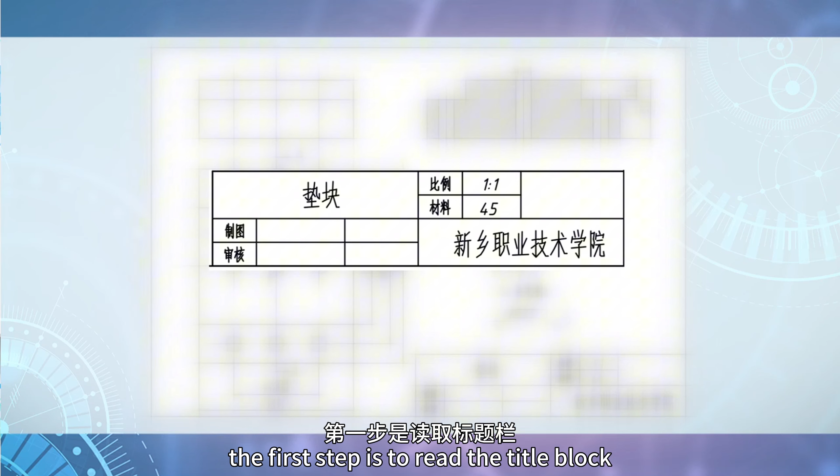First of all, let's analyze today's drawing. According to our drawing reading steps, the first step is to read the title block. The name of this part is a spacer block. The drawing scale is 1:1. The material is number 45 steel.

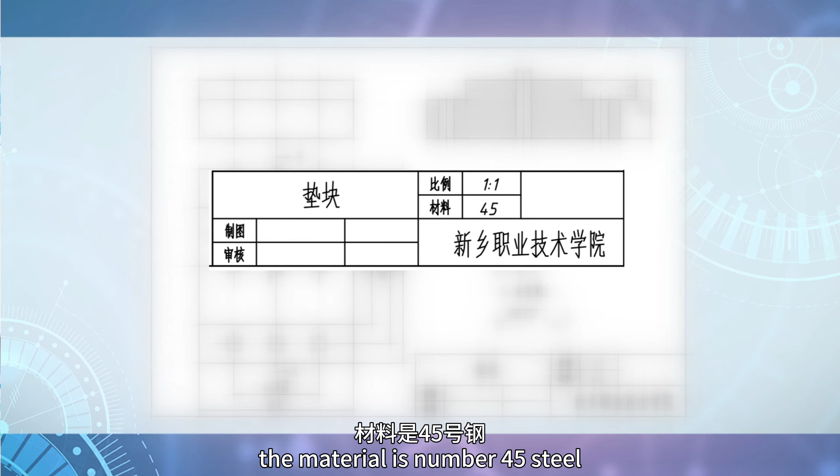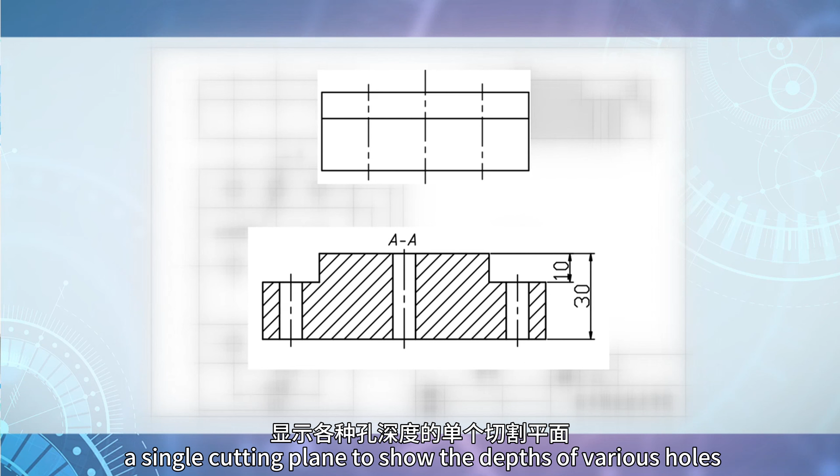The second step is to read the views. This part uses 3 basic views. Among them, the front view and the left view can reflect the step structure and the overall height. The left view uses a full section view with a single cutting plane to show the depths of various holes. The top view shows the distribution of holes on the workpiece surface.

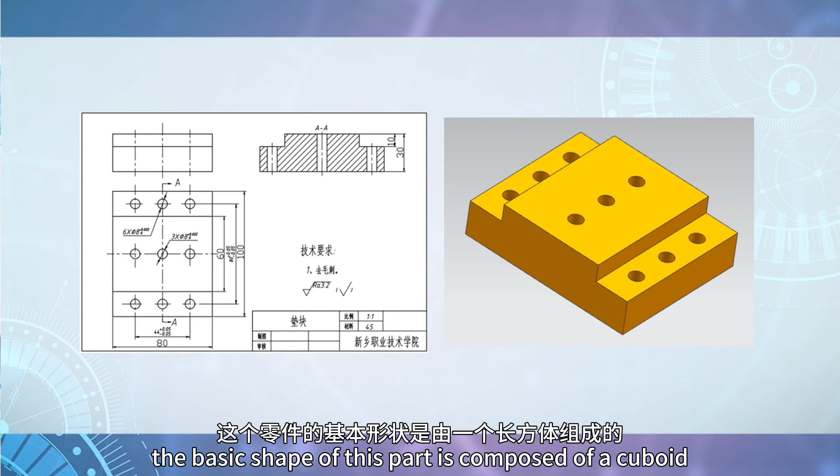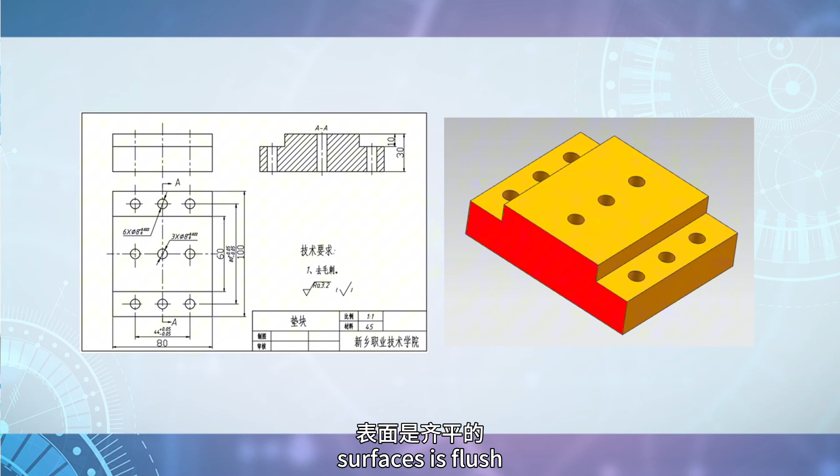Next, we'll conduct a shape analysis. The basic shape of this part is composed of a cuboid. On this basis, after milling, we obtain the top surface, bottom surface, stepped surfaces, and multiple holes. The connection relationship between the left and right surfaces is flush. The side surfaces of the front and rear bosses and the side surface of the base plate are not flush with each other.

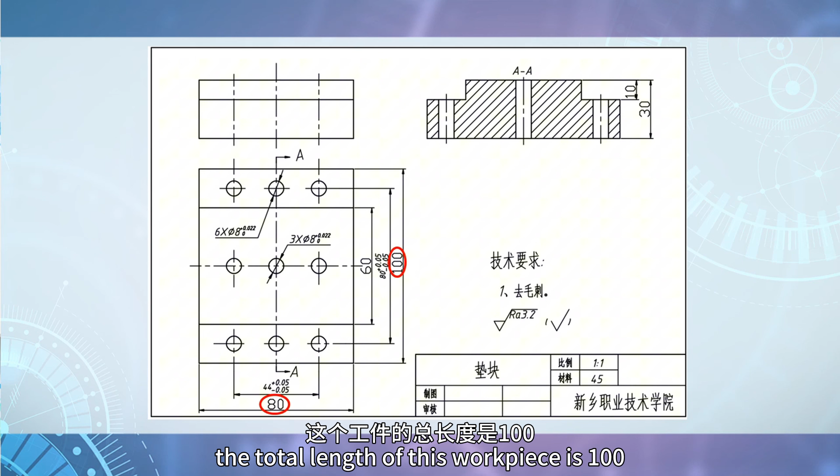Third, let's read the dimensional annotations. First, look at the overall dimensions. The total length of this workpiece is 100. The width is 80 and the height is 30. Next, look at the datums in each direction. The length and width directions are based on the center of the workpiece. The height direction is based on the bottom surface.

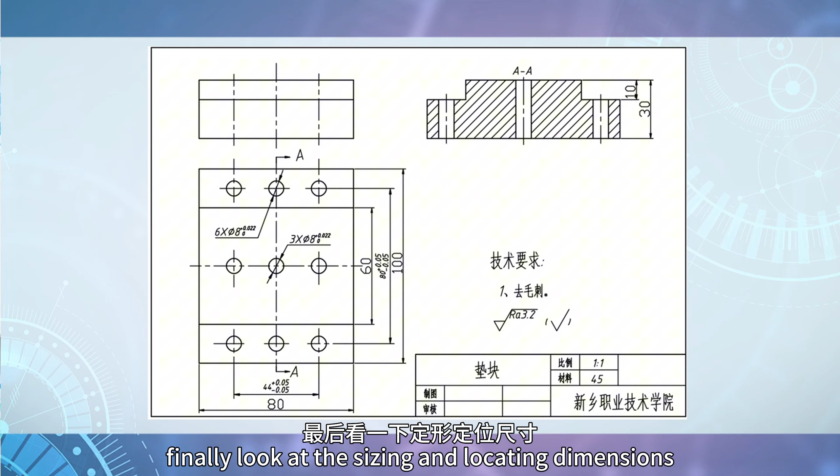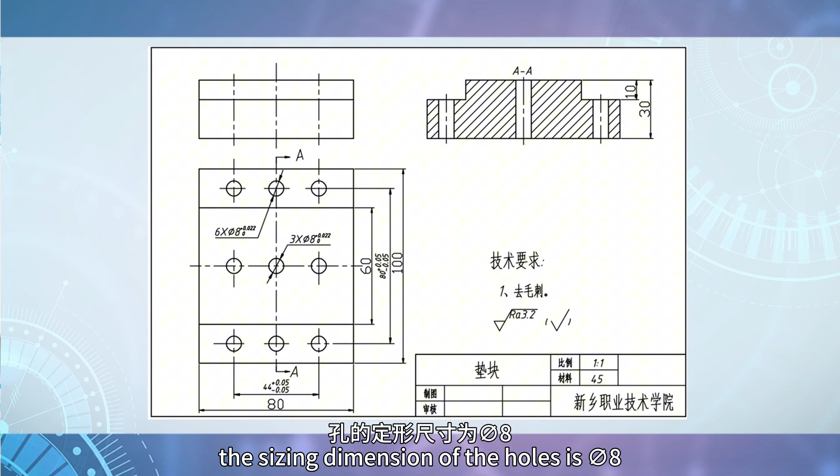Finally, look at the sizing and locating dimensions. The main machined elements of this part are the stepped surfaces and holes. The main sizing dimension of the stepped surfaces is the height dimension of 10. The locating dimension is 60. The sizing dimension of the holes is phi 8. The locating dimensions are 44 plus or minus 0.05 and 80 plus or minus 0.05.

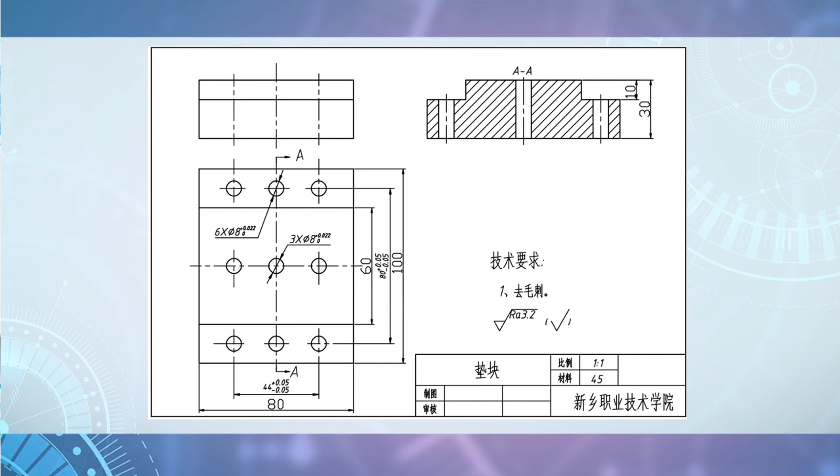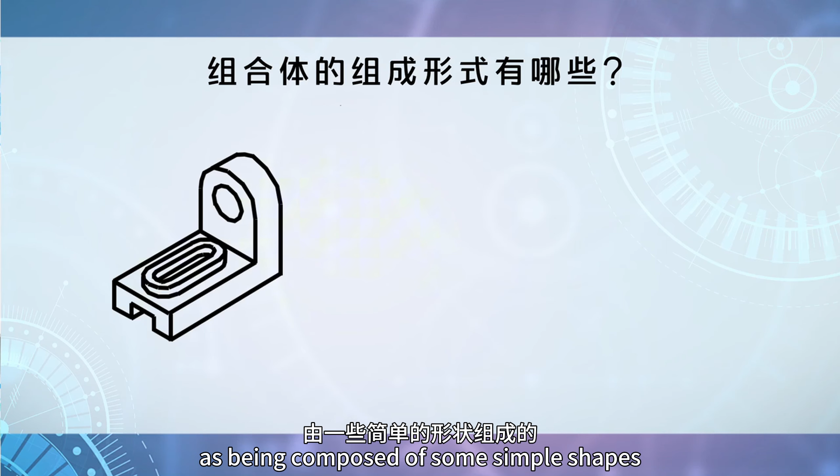After analyzing the above drawing, today we will focus on guiding you to understand the composition forms and surface connection relationships of the composite bodies in the drawing. First, let's understand what the composition forms of composite bodies are. Any complex shape can be regarded as being composed of some simple shapes through certain combination methods.

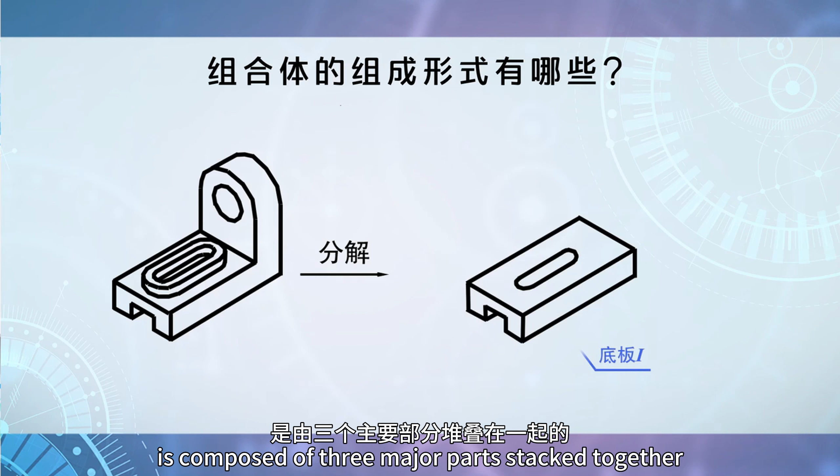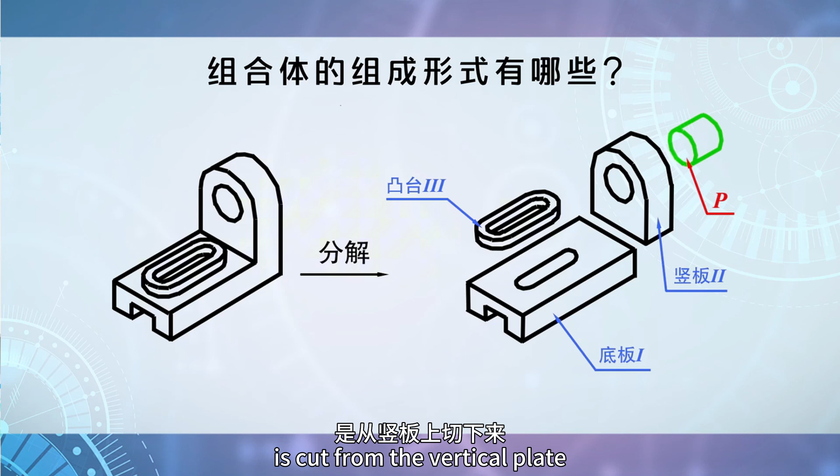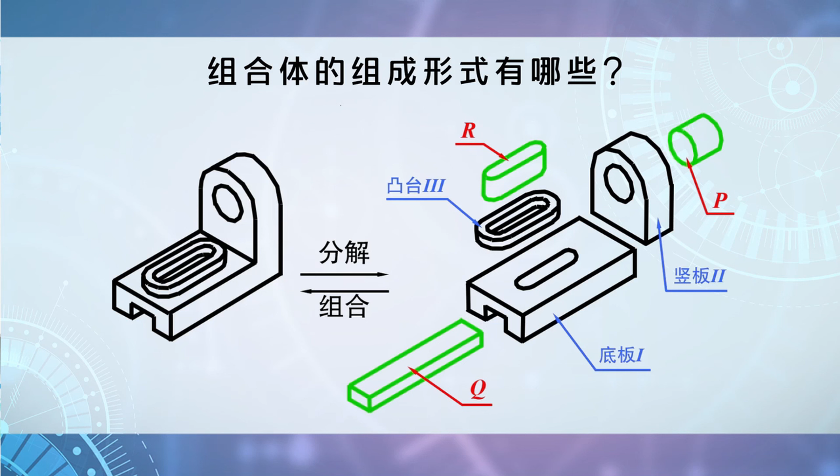For example, such a part is composed of 3 major parts stacked together: the base plate 1, the vertical plate 2, and the boss 3. Then, based on this, a small cylinder P is cut from the vertical plate, a rectangular prism Q is cut from the base plate, and an ordinary key R is cut from the boss, ultimately forming such a part. From this, we can see that no matter how complex a part is, it is composed of several basic bodies through 2 basic forms, cutting and superposition.

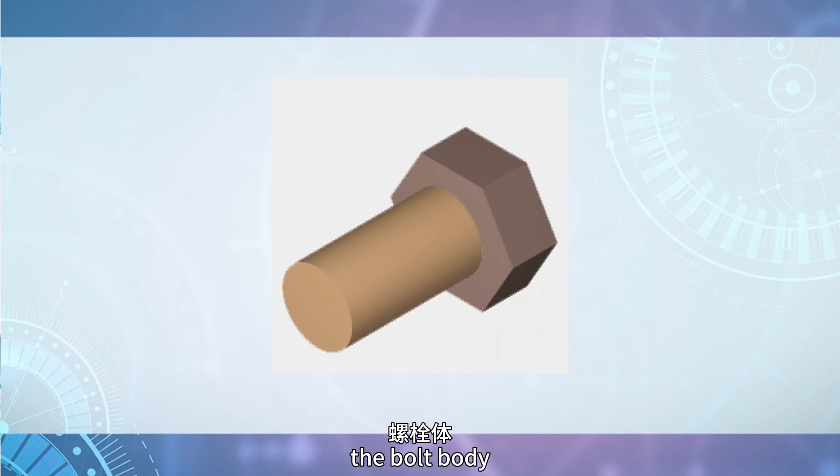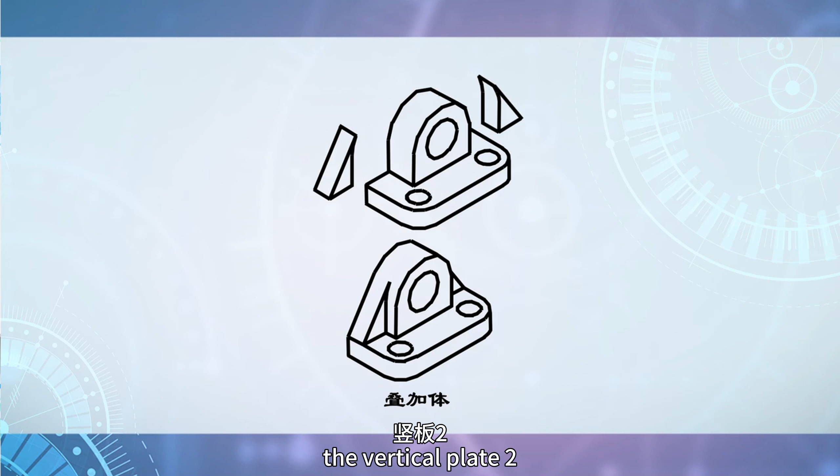Among them, the superposition type is a combination method where the surfaces of several basic bodies overlap, are tangent, or intersect to form a whole. As shown in the figure, the bolt body is formed by superposing a cylindrical basic body and a hexagonal prism basic body. As shown in another figure, the part is also a typical superposition type composite body. It is stacked together by the base plate 1, the vertical plate 2, and the left and right ribs 3 and 4. Then, simple cutting operations are performed separately. Finally, such a part is formed.

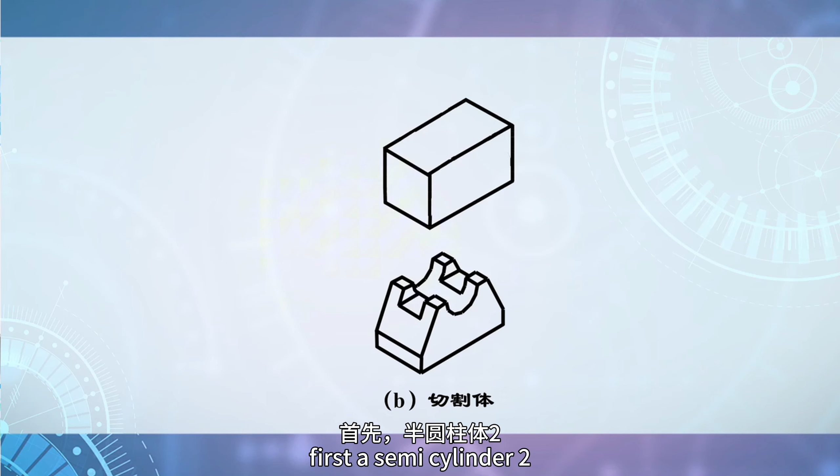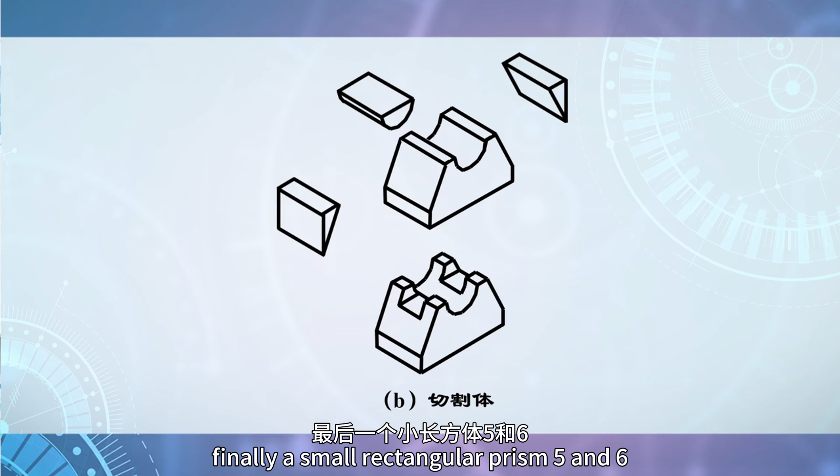The cutting type is a solid formed by cutting off several small pieces from a basic body. As shown in the figure, the part is first formed by a rectangular prism 1. First, a semi-cylinder 2 is cut out from the middle of the upper surface. Then, triangular prisms 3 and 4 are cut out from the left and right sides, respectively. Finally, small rectangular prisms 5 and 6 are cut out from the middle. And ultimately, the most common composite body is obtained through a combination of superposition and cutting. For example, the part shown in the diagram.

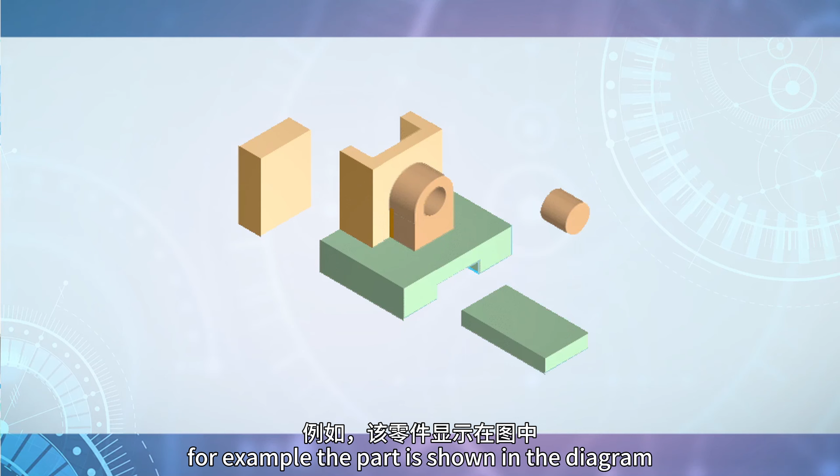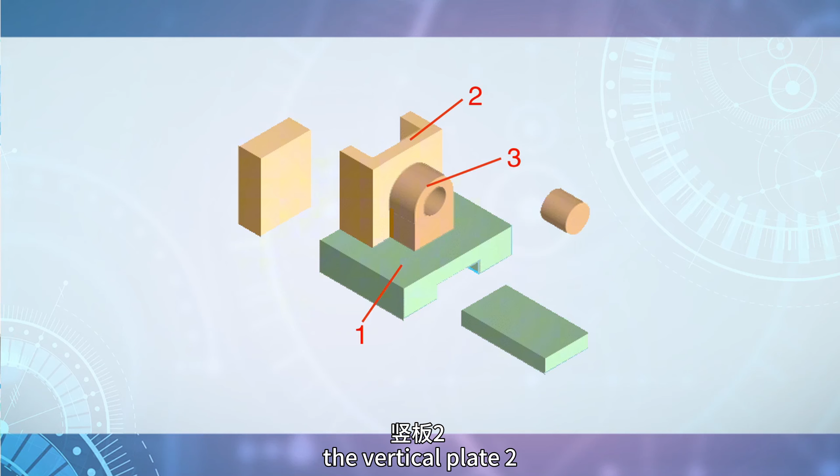First, it is composed of 3 superimposed parts: the base plate 1, a rectangular prism, the vertical plate 2, an upright rectangular prism, and the boss 3, a combination of a rectangular prism and a half cylinder. Then, a small rectangular prism 4 is cut out from the center of the bottom surface of the base plate.

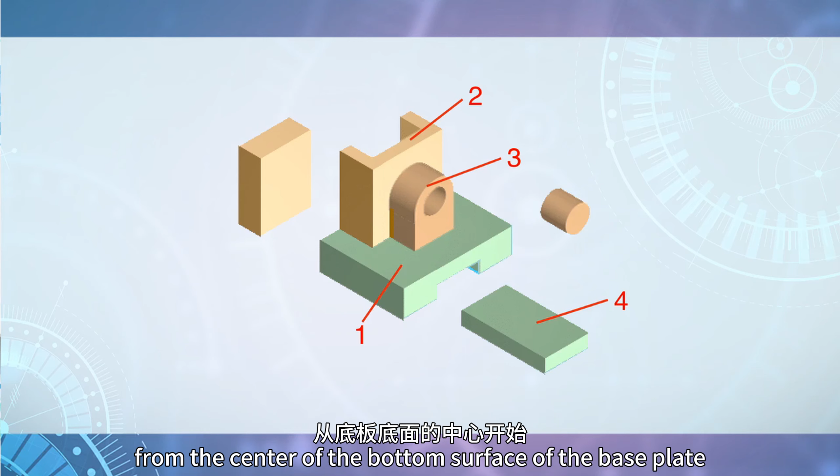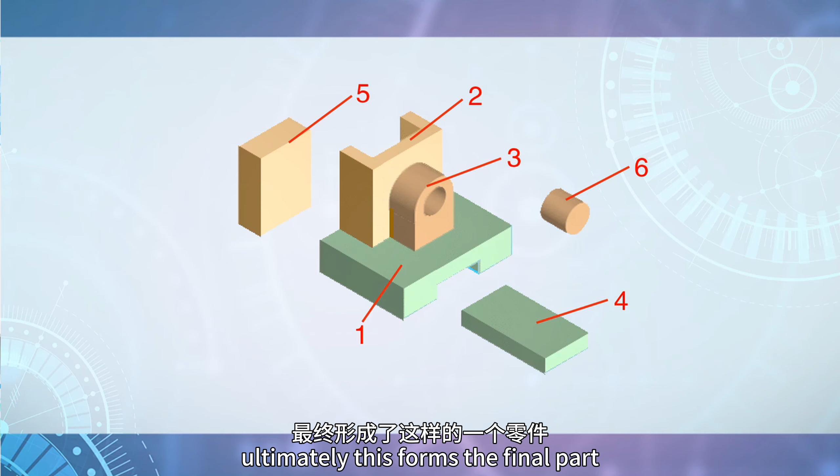Next, a rectangular prism 5 is cut out from the back of the vertical plate. Then, a small cylinder 6 is hollowed out from the front boss. Ultimately, this forms the final part. This is a typical example of a combined superposition and cutting process. This form is also the most common combination type in mechanical parts.

Through the above analysis, we find that the drawing of this task can be understood as a typical combined cutting assembly. First, based on rectangular prism 1, rectangular prism 2 is cut out from both the front and back surfaces. Then, 9 cylinders are cut out from the top surface and stepped surface to form holes.

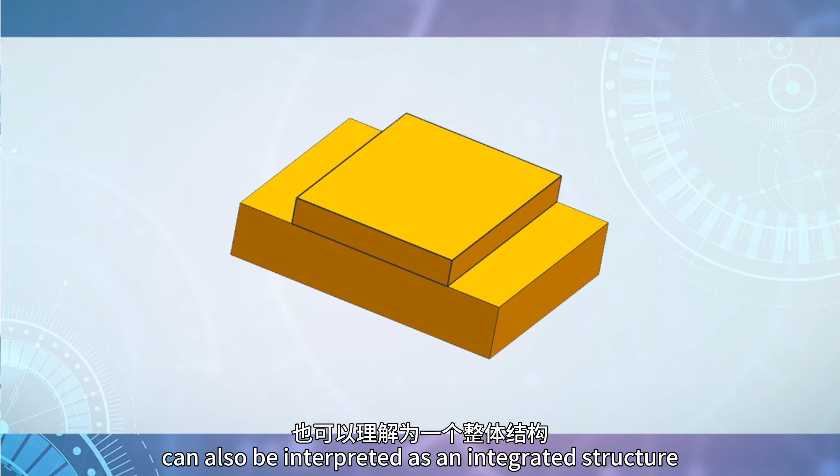Meanwhile, this combined form can also be interpreted as an integrated structure. First, a small rectangular prism 2 is superimposed onto the middle of the bottom rectangular prism 1. Finally, 9 cylinders are cut out to form holes, resulting in the final workpiece.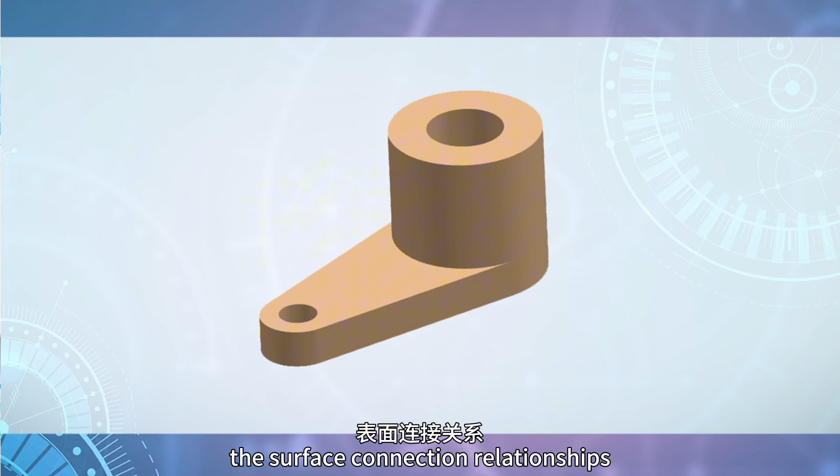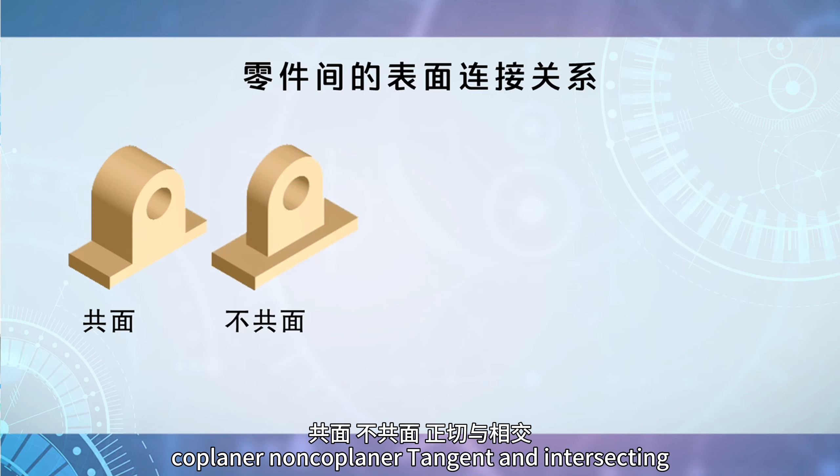Now that we understand the combined form of the assembly, let's analyze in detail the surface connection relationships between the combined parts. The surface connection relationships between parts mainly include 4 types: coplanar, non-coplanar, tangent, and intersecting. How are these 4 connection types distinguished and represented in technical drawings? Next, we will introduce the drawing conventions for different connection forms in detail.

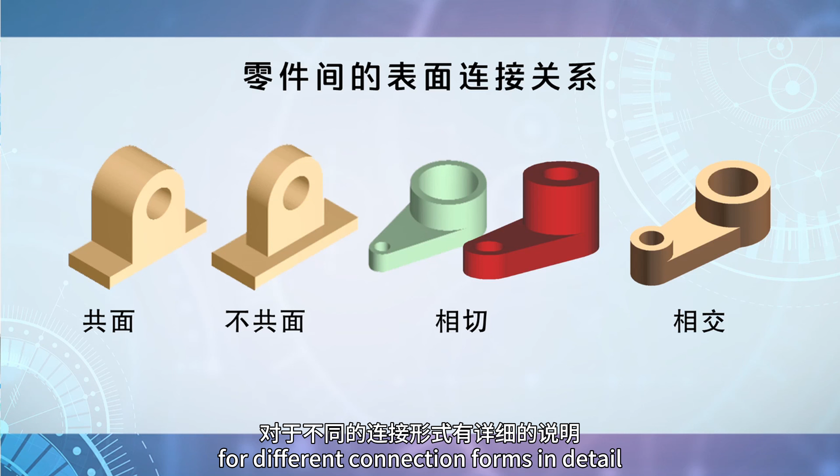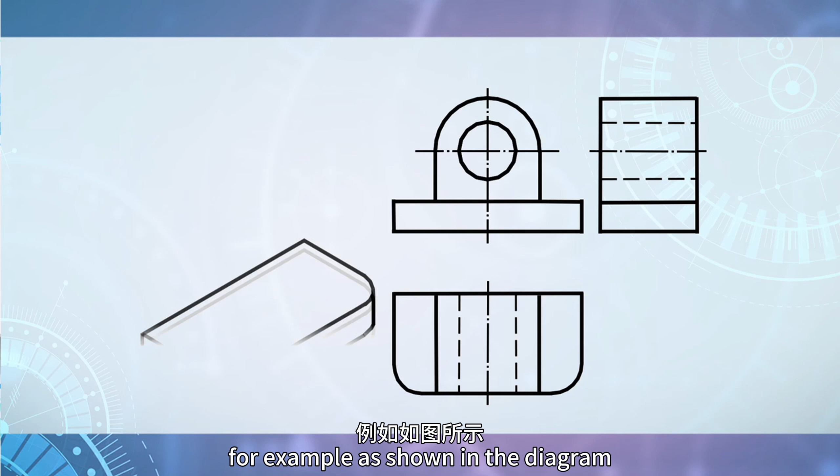First, let's examine the coplanar and tangent connection types. A coplanar connection means the surfaces of 2 objects are flush. At the flush location, no dividing line should be drawn in the projection drawing. For tangent connections, since the tangent line is not a contour line of the shape, it should not be drawn in the projection drawing. For example, as shown in the diagram, surfaces 1 and 2 are coplanar.

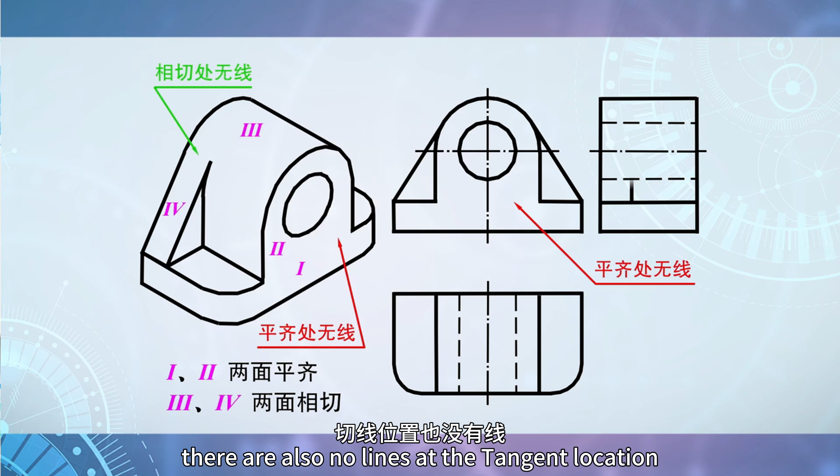Therefore, there are no lines at the flush junction in the physical object or the 3 orthographic views. The left and right ribs 4 are tangent to the cylinder 3. Therefore, there are also no lines at the tangent location in the physical object or the 3 views, as shown in the left side view and top view.

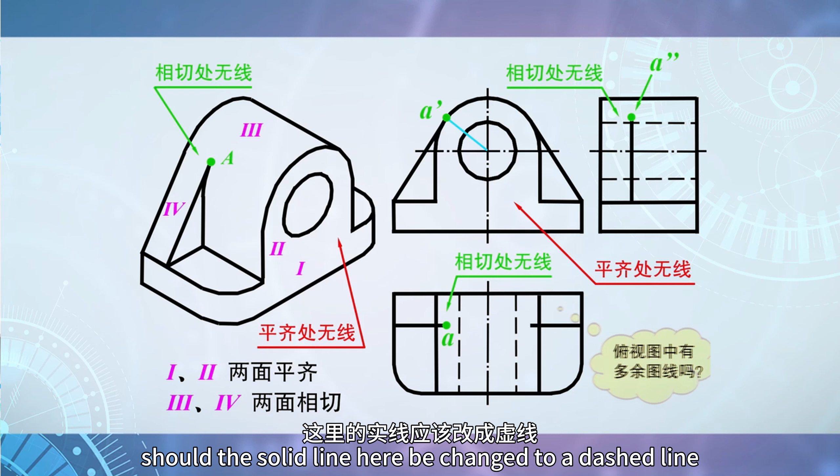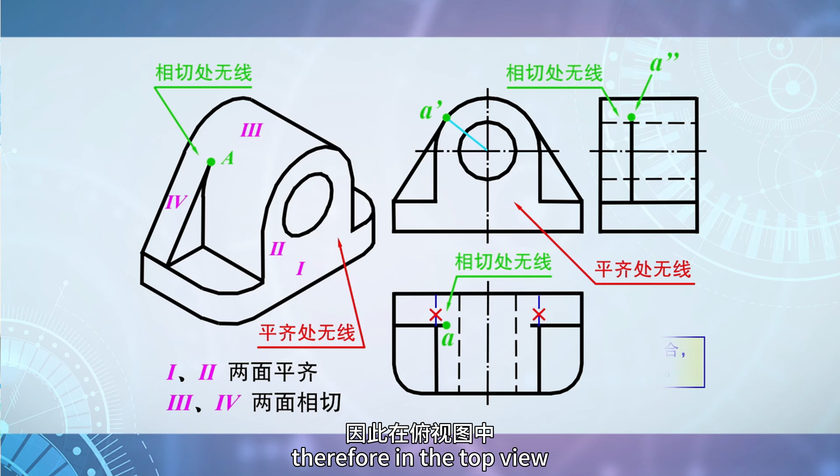After the sides of the original shapes 1 and 2 intersect, they are obscured by the ribbed plate. Then, in the top view, should the solid line here be changed to a dashed line? Now, please pay attention. This is the area where mistakes are most likely to occur. When shape 3 and rib 4 are superimposed, the 2 shapes merge. There are no lines inside anymore. Therefore, in the top view, there are also no dashed lines here.

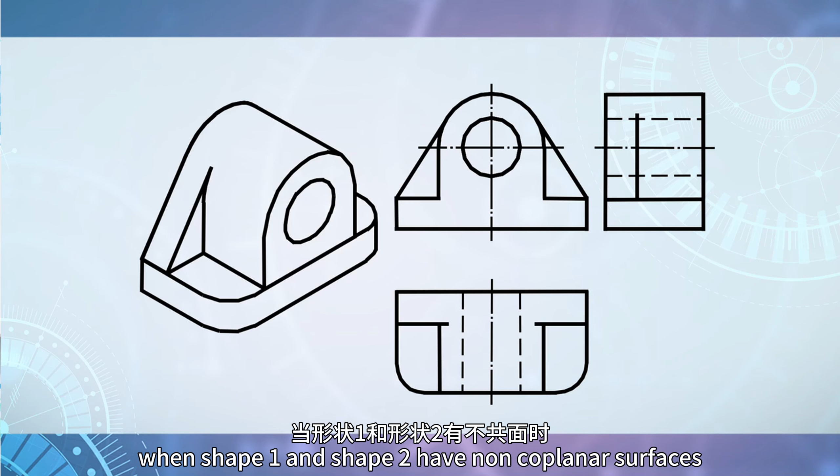Next, let's look at the non-coplanar connection type. Non-coplanar means not flush. If adjacent surfaces are not flush, a dividing line should be drawn at the junction. When shape 1 and shape 2 have non-coplanar surfaces, that means not flush, then there should be a line here. Similarly, rib 4 is tangent to cylinder 3. Therefore, there are no lines at the tangent location.

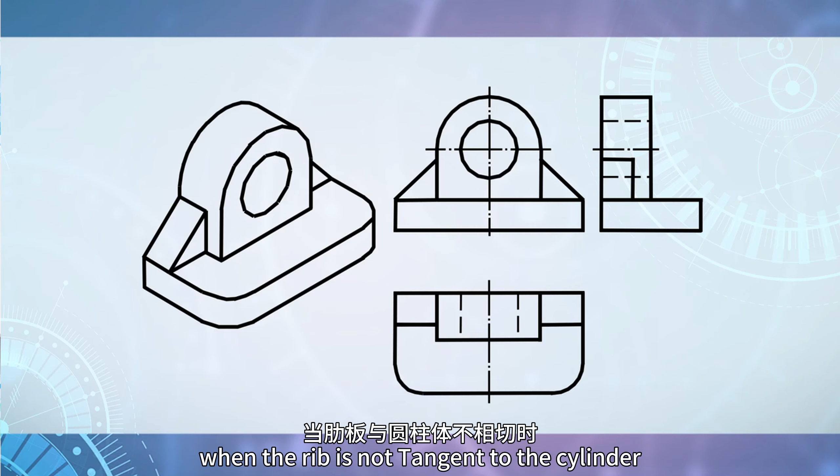Furthermore, let's examine the intersecting connection type. When the surfaces of 2 basic shapes on an assembly intersect, an intersection line should be drawn at the intersection. When the rib is not tangent to the cylinder but intersects it, it means not only are surfaces 1 and 2 not flush and require an intersection line, but since surfaces 3 and 4 also intersect, an intersection line should also be drawn at their intersection.

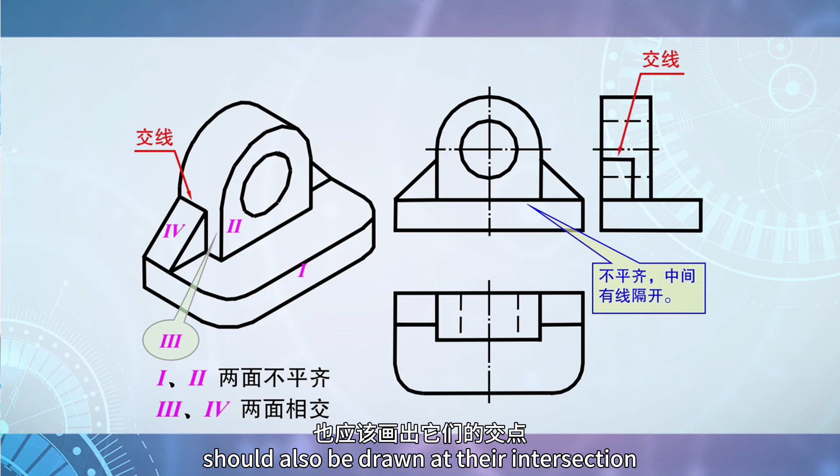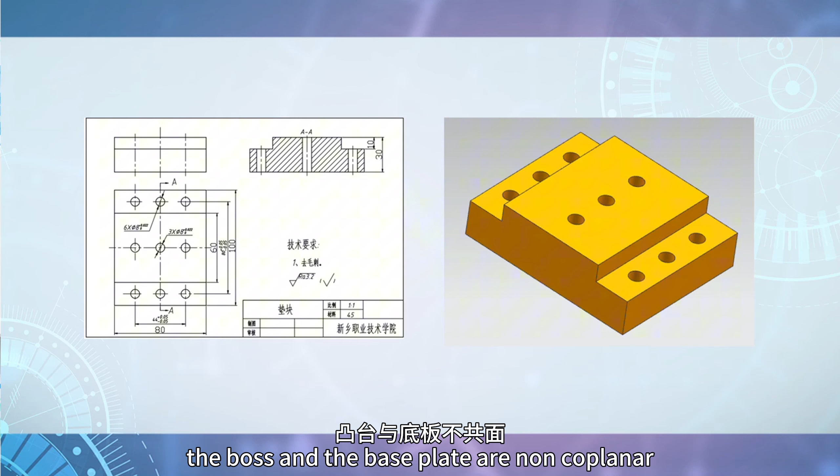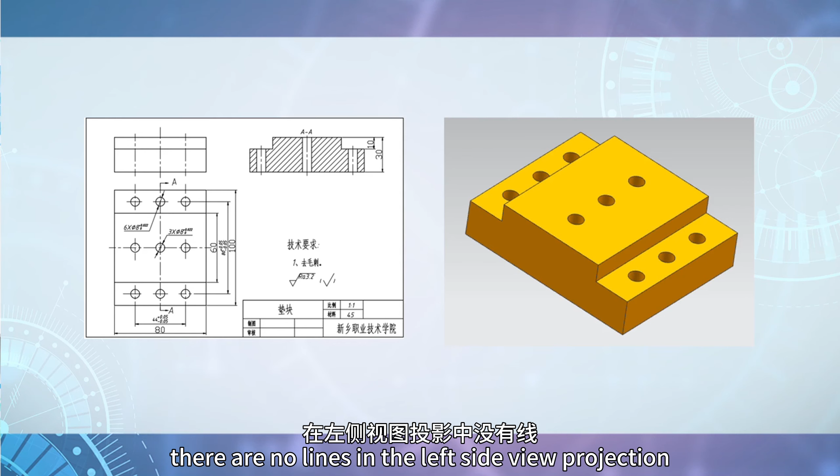Through the above analysis, we find that the assembly in this task's drawing is combined through coplanar and non-coplanar connections. In this assembly, the boss and the base plate are non-coplanar in the front-to-back position. Therefore, there should be a line in the front view. However, the bosses on the left and right sides of the workpiece are coplanar with the base plate. Therefore, there are no lines in the left side view projection.

Through this study, we have learned about the combination forms of assemblies, surface connection relationships, and their drawing conventions. This will help us further interpret complex part drawings.